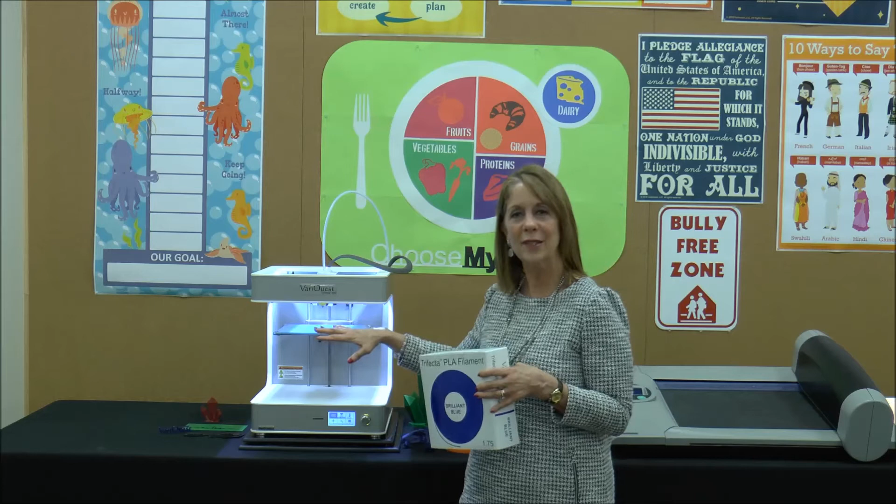It doesn't emit any messy substances or odors of any kind, and it's completely safe. Because it's plant-based and designed this way, that's how we're able to have this nice open footprint, because nothing heats up except for the hot end nozzle. The hot end nozzle is located up on top. There's a little yellow piece that goes around it to signify that it does get hot and you don't want to touch that area. But that's virtually the only area you or your students need to be aware of. Otherwise, everything is at room temperature.

So again, they can get close, they can watch the 3D prints come to life, they can get a nice bird's eye view as well, and it's completely safe.

When I talk about the hot end, just so you know, when it heats up to its maximum temperature, it's 220 degrees Celsius, about 430 degrees Fahrenheit. So absolutely make sure students keep their hands out of reach, but again, everything else is safe.

Getting back to this plant-based filament, it doesn't adhere directly to the glass build plate. That's why we have blue painter's tape to create that adhesion. It's such a simple solution because when you need to replace it, you just peel off the strips and put on new ones, so it's very easy to maintain and use. You can get blue painter's tape anywhere, and we also gave you a roll of it with your investment.

This is all described in better detail in the bed leveling video I referred you to. It's essential to have your bed properly leveled so you get a good print every time. Once you go through the video and the initial leveling steps, you should be good to go—unless you bring your Trifecta to a science fair or another event and it gets transported elsewhere, in which case you'll need to re-level the bed. Otherwise, while it's at your school and not getting jostled, you should be fine. So watch the video; it'll be very helpful.

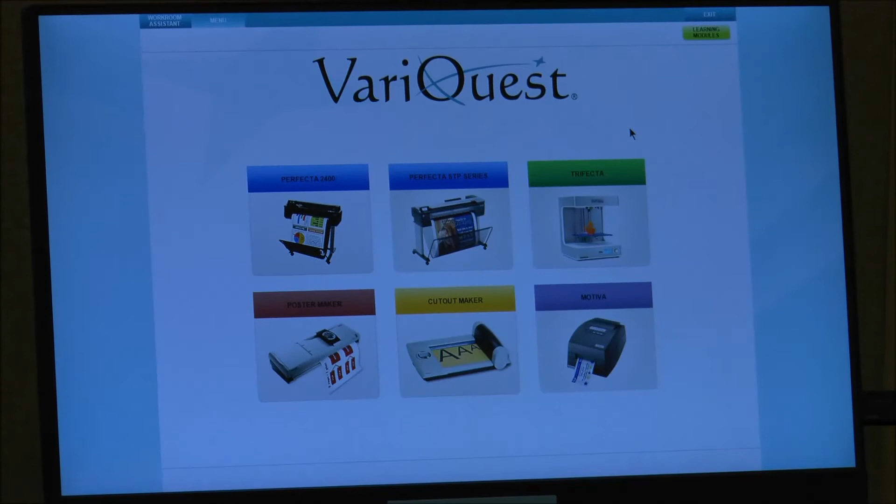Once you are ready to open up the Trifecta software, just click on the Trifecta icon, whether you're doing it from your design center or from a computer. Then what you want to do next is find the file that you want to slice and print.

I happen to have my STL files on my thumb drive, so I am choosing that drive. I'm clicking on the file where my file can be found. Once you have the 3D print selected, by clicking on it, just click OK. That's what actually launches the VariQuest software, and once it launches, it puts your object on the build plate.

Here's where you can adjust your printer settings before you print. I'm going to review those with you real quick, and then we'll proceed to slice the 3D print as well. In your user's guide, pages 15 and 16 go through each and every one of these setting options that I'm reviewing with you now, so you can become more familiar on your own time as well.

But a couple things to note. First of all, down below, here's where you have the option to resize your object before you print. It comes in at 100%. If you want to make it twice as big or maybe half as big, you can make those adjustments very easily. If you have your keyboard, you would just hover over it with your mouse and type in the percentage that you want, and you'll find that the height, the width, and the depth adjust automatically, but you can adjust those on your own as well.

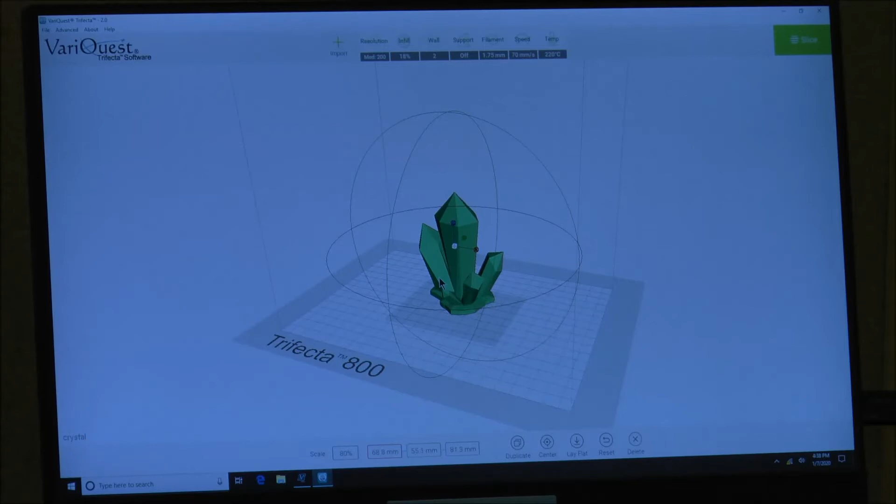But if you don't have a keyboard, like right now I'm just using my mouse, there is a white button that you can click on right by the object itself, and when you drag your mouse back and forth, you can see how it makes the object bigger or smaller, and it is changing my scale down below. So I'm going to make it a little bit smaller because I want to take a little less time to print this.

Obviously, the bigger it is, the more time it's going to take to print, but really there is no time limit. Keep that in mind, that you can print as long as you've got filament. You can print for as long as you need to get the desired object that you want. But that's how you can scale it and change the size of the object.

The other thing I wanted to mention is down below you can duplicate. If you know you want to do multiples of this gem, you can click on the duplicate button and you can enter in the quantity that you want.

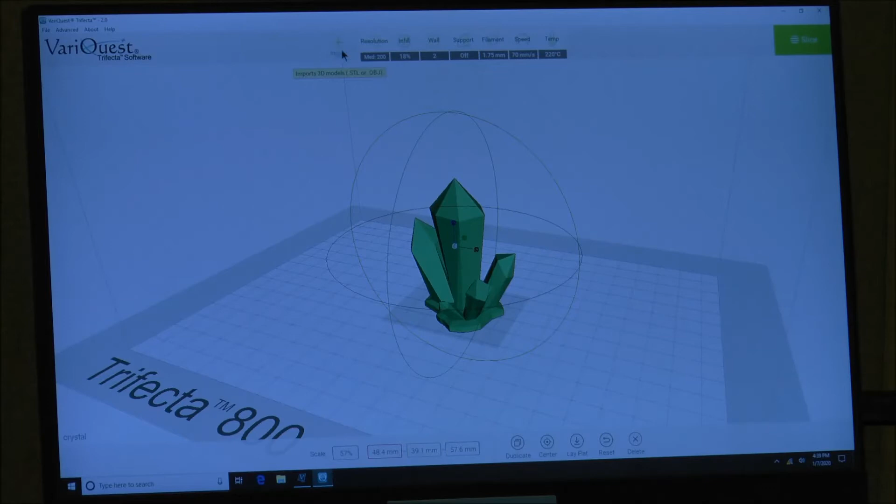There's also up above this import button that you can click on. This allows you to bring in additional prints. So you can go back to where you were and bring in another print, for example, and it just positions it right onto your build plate.

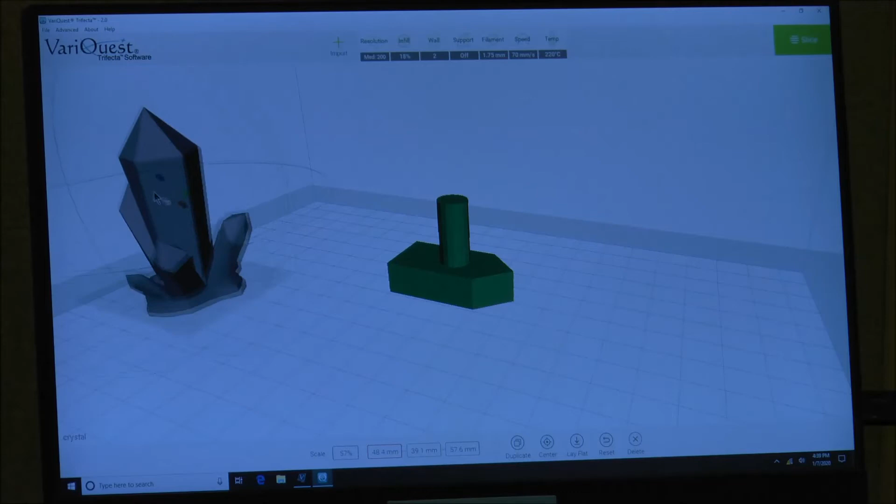Now, if ever you find that the object is gray like that, then you know it's out of bounds. So just keep that in mind. You always want it to stay within the printing range, and you always want to make sure that it's represented in green versus gray.

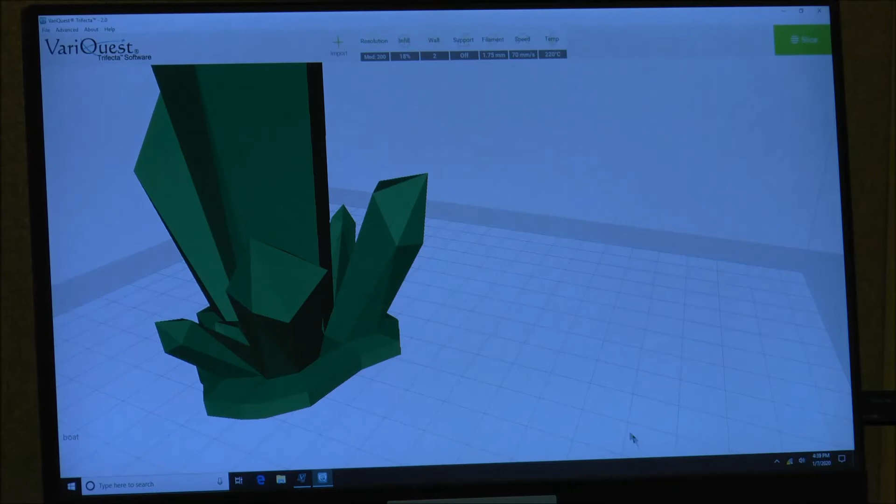You can always reset. There's a reset button too, to get back to where you were before. If you don't want a particular print on there, like I don't need to print two objects right now, there is a delete button as well. So I deleted that, and then again, I'm going to reset it.

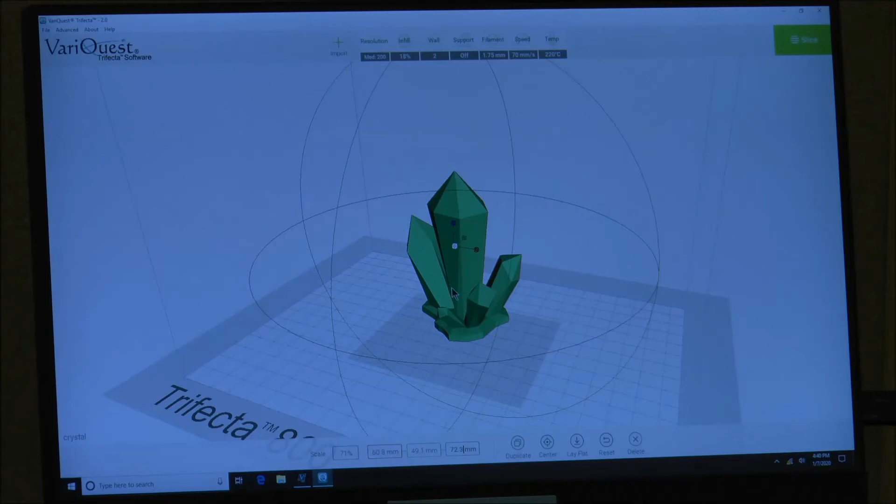You will find also that sometimes, and there's also a center button, by the way, too, so it just makes it really easy to get it back to the way you want it. I did reset it, so I'm going to go ahead and make it a little bit smaller like I did before. But sometimes you're going to find that your print comes in kind of kittywampus. It doesn't lay flat when it puts it on the build plate.

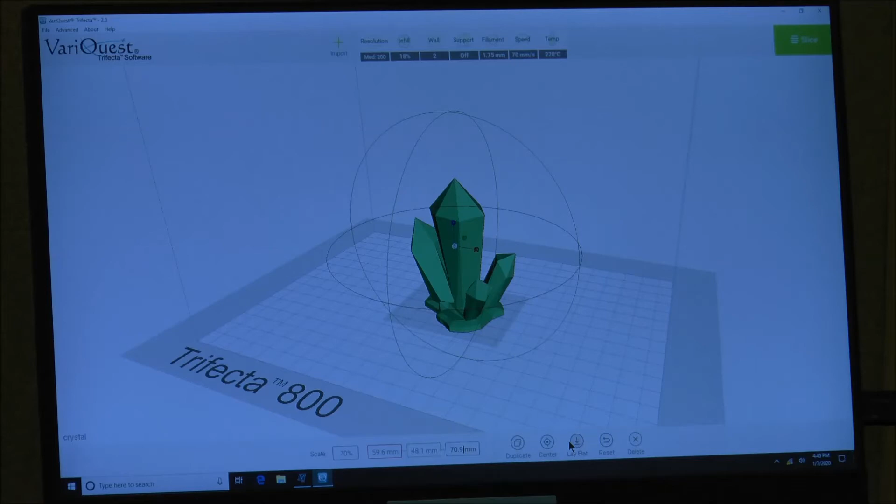If that should happen, there's a lay flat button you can click to make sure it's lying on the biggest, flattest surface to ensure added stability when printing. So if it comes in a little off, just click the lay flat button and it will make that adjustment for you.

You also have these different axis rings that students can use to see the print at all different kinds of angles, etc. So that's a little bit about that.

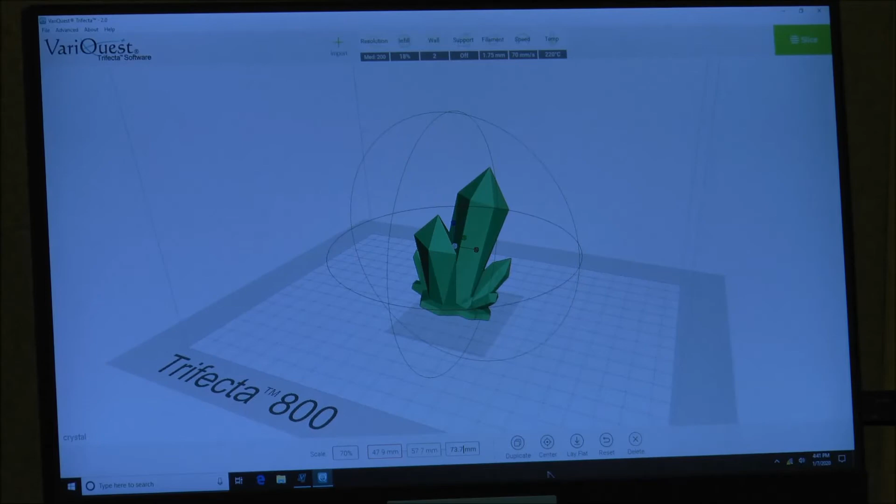Up above, you're going to find your printer settings. So that's what I'm going to review with you now, starting with resolution. What I love about this software is it's so user-friendly in that you can hover over a particular setting and it gives you a drop-down window that tells you exactly what that's going to do.

As I click on resolution, you'll find there are 4 different settings, ranging from 50 microns all the way up to 300. So 50, 100, 200, and 300 microns is how resolution is measured. The default is 200 microns, so you can leave it at that, or if you need adjustments, that's when you'd select a different resolution.

The smaller the number, the 50 microns, gives you the finest print. That means the layer of filament is as thin as it can be, and you get a very solid, really fine, high quality print when you select 50 microns.

Now with a gem like this, it doesn't really matter, so I could leave it at 200 or even bump it up to 300 microns. The resolution isn't going to be as good, meaning you'll see more lines going across representing the different bands of filament, but it still turns out to be a great print.

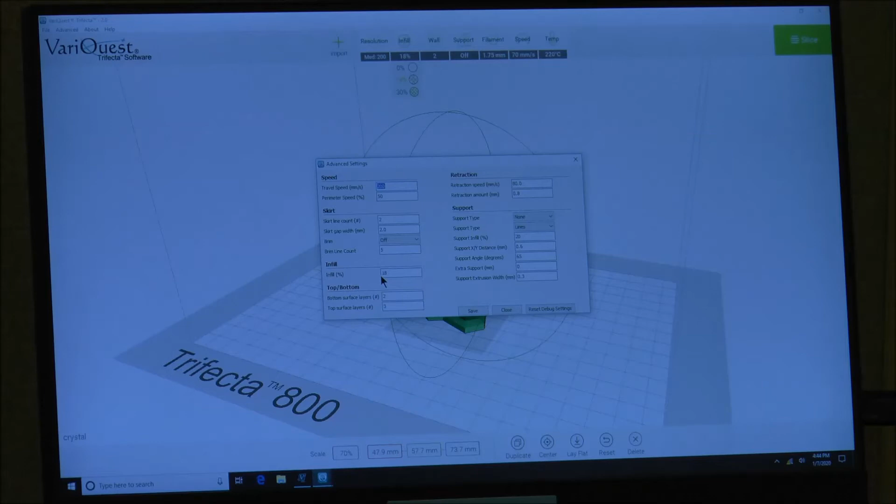The higher the infill, the more filament you're going to use, and the more time it's going to take to print, so do keep that in mind as well. I'm going to get back to this window in a second, but that is what infill is.

Next you have wall, which is the thickness of the outer perimeter of the print. The wall ranges from 1 to 4, and the higher the number, the thicker the wall. If you need added stability, you might want to select 3 or 4 for a thicker wall around your print. The default is 2, and for this particular object, 2 is just fine, so I'm going to leave it at that, but that is wall.

Next to wall is support. Support is not activated, but you'll want to activate it if you have overhanging structures. It's important to create that stability for overhanging structures. Think about an eagle with its wings fully spanned out, for example. When it's printing and gets to those wings, if they aren't supported, they're going to collapse right away.

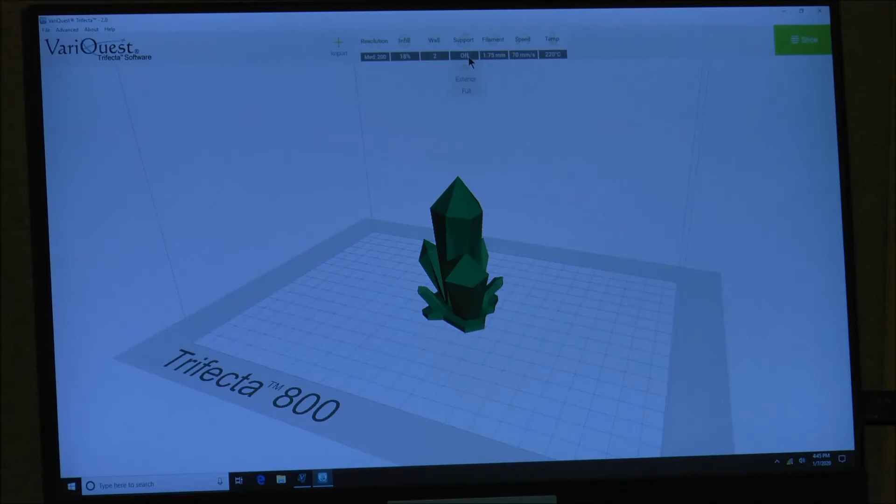So what you'd want to do is either activate exterior or full support. Exterior basically adds support from the overhanging structure down to the build plate, with thin strands of filament that adhere those two together to make sure the wings, in this case, don't collapse.

Full support adds support layers of filament, thin strands, wherever there are overhanging structures. So even if it's going from one overhanging structure on the print to another and then down to the build plate, it will do that. It figures out where it needs to build support, not just from the overhanging structure to the build plate, but anywhere it's needed. So if you're not sure, just select full, and it will build those support layers.

When your print is done, those support layers break off very easily because they're such thin strands of filament. So you just break them off and you're good to go.

Again, this is that trial and error process. Think about students going to print without having support activated, and their object collapses right away. Then they have to go back to the drawing board and figure out what went wrong, and it becomes clear that they probably should have activated support. It's all part of that hands-on learning approach, really engaging with these different objects being printed. So that is what support is.

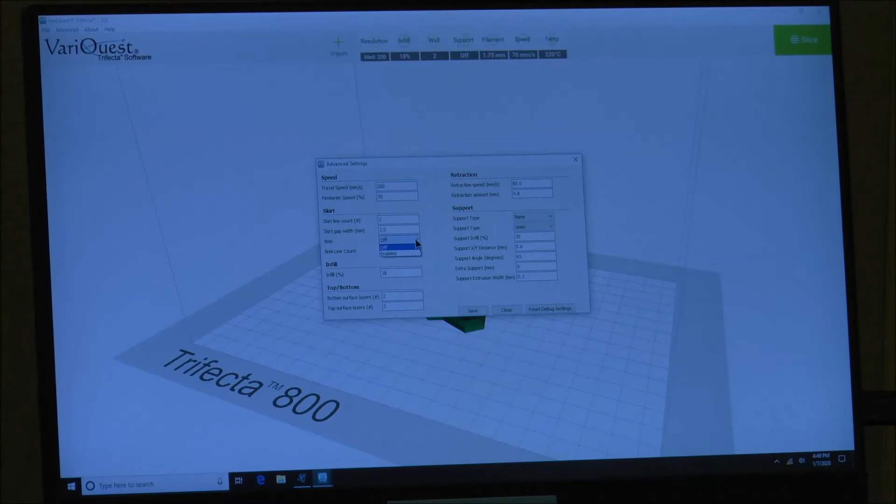What it does is, for those objects that need some added support on the build plate, you can activate brim, where it builds thin layers of filament from the base of the object and adheres it to the build plate. So even if you have a properly leveled print bed that you've maintained well, and you're still getting a lifting effect, you might want to activate brim to counter that lifting effect and keep it from warping.

I always like to give the example of the Eiffel Tower. If you're printing that, you've got a tall tower with four thin, skinny little legs. So your base can get a little wobbly and it can get more difficult to support that taller structure. For that, you would want to activate brim because it's going to secure the foot of the print to the build plate so it doesn't lift up or warp on you.

Note that when you take it off your build plate, you'll have those thin strands of filament under the base of the print. Sometimes those are a little harder to get off, so you want to use a chisel or a file to file those down.

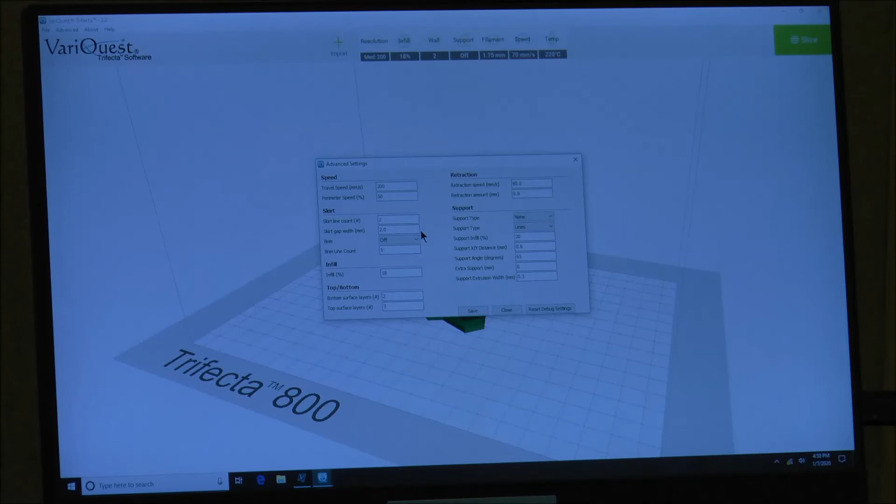But that's what brim is. Those are the features that I like to call out in training as it relates to the Trifecta software, the advanced setting options that you may or may not choose from time to time. So just wanted to cover that.

Once you have everything the way you want it, then you're ready to go ahead and slice your object. Up here in the upper right is where you see the slice button. Just go ahead and click on that. As you can see, it's kind of like frosting a layered cake. It just builds it layer by layer until it's done. So it does it digitally, and that's how it's going to print on your Trifecta printer.

Once that has occurred, you'll notice down below that it does give you the approximate weight of your 3D print, and it tells you approximately how much time it's going to take to print it. So that's very helpful information.

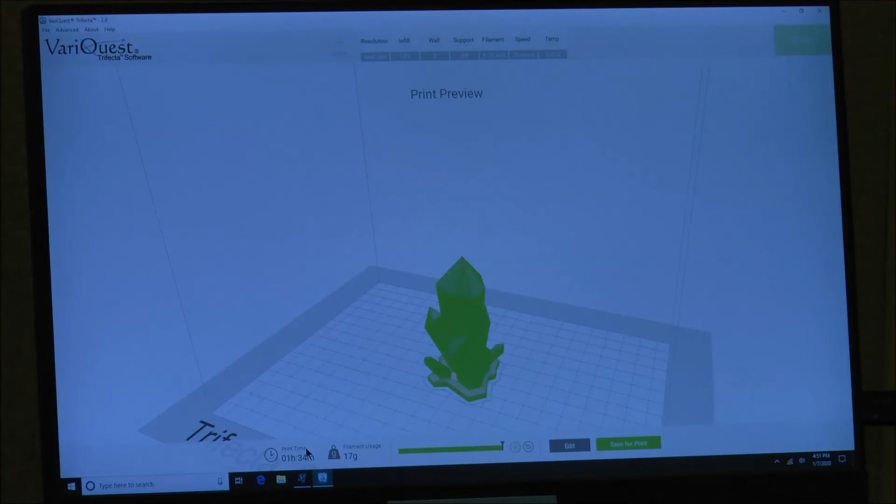We also on our VariQuest Resource Center have a cost calculator. So on the home page, click on Trifecta, click on the cost calculator, you can input the estimated weight, and it will give you an approximate cost for that object. Great for your student-based enterprises where you are tracking costs, because maybe you're selling different things in your school store. It's nice to be able to calculate an estimated cost of that 3D print.

I always like to show this too, how you can just kind of flip the build plate around to see it from all kinds of different angles as well.

I also wanted to mention that our Trifecta has one hot end nozzle, as I kind of alluded to earlier, and that means that you can load one color of filament at a time. But we recognize that there are going to be times that you want to do a multicolored object. That's another feature of the Trifecta that's so nice for schools, because having only one hot end to worry about is really going to help with cutting down any maintenance issues, any problems, etc. So nice to have just that one hot end nozzle.

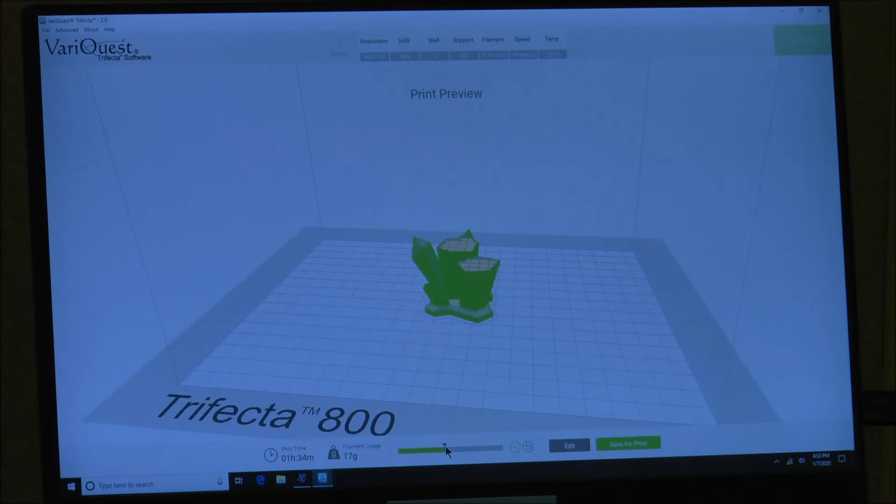But again, we know that periodically you'll want to do a full color print from time to time. So the way that you can achieve that is down below. After it's been sliced, you'll see that you have this bar with this arrow. When you move the arrow with your mouse, you can see how it's recreating or building that object layer by layer. To add different colors to your object, all you do is take your arrow and pull it to the point where you want it to pause so you can change out your color. You put your arrow at that desired spot, then you click on the plus sign, and that is going to pause your print job so that you can take out your existing color, put in a new color, and resume where you left off.

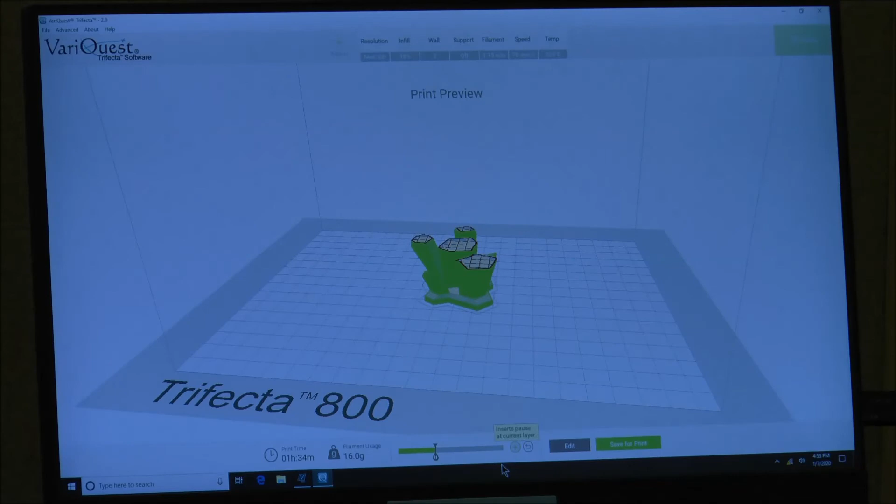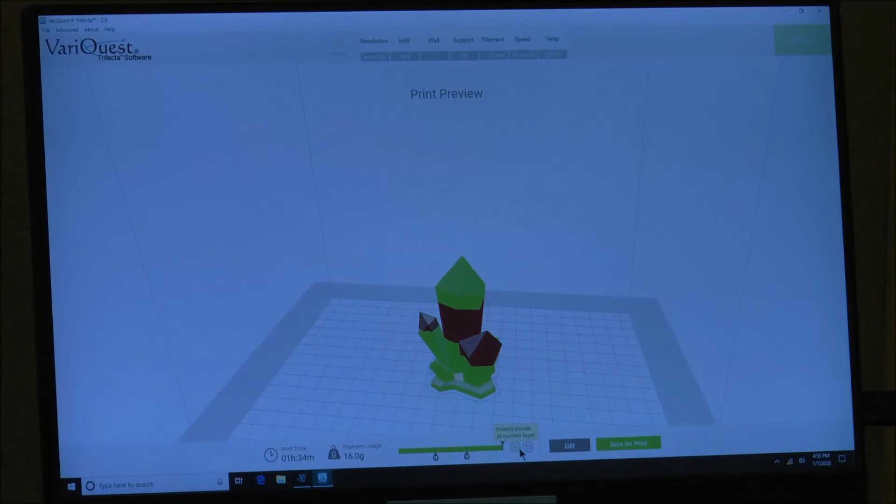Then you can take the arrow again. You can build in all your pauses in advance, of course, and do it all the way to the end. So here you can see I'm going to be able to get a multicolored object. I can do 3 different colors, and again, it will automatically pause so I can take out my one color, put in my new, and achieve a multicolored object that way.

Another use, and we have so many schools that have engaged their students even further by using our clear filament, printing their object, and then having students paint their object any color that they want with acrylic paint is what we recommend. They can really take ownership of what they've created by adding some pops of color and painting that 3D print as well. So that's another way to achieve a multicolored object.

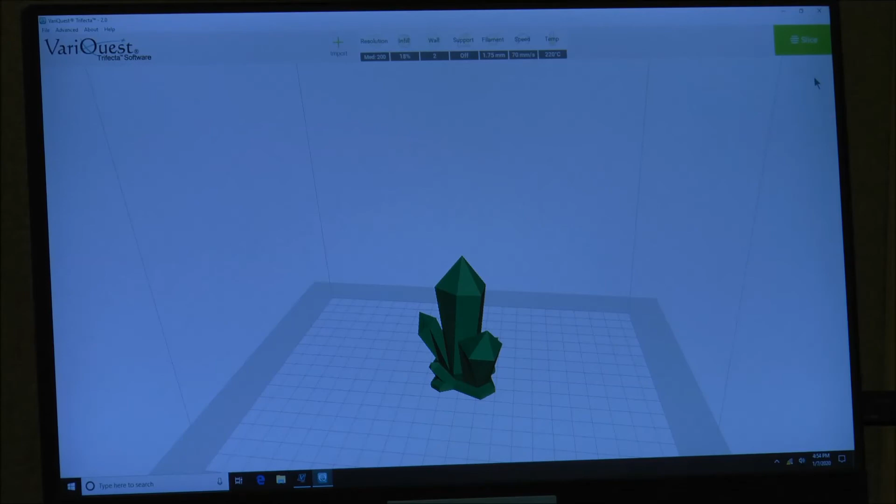Now I'm going to go ahead and edit this because I don't want it to print in multicolors right now. So there is an edit button that takes you back to where you were, and you can just easily slice it again if you should go back and make any edits. And there we go, we've got it perfectly sliced. Now what I'm going to do is save what I've done.

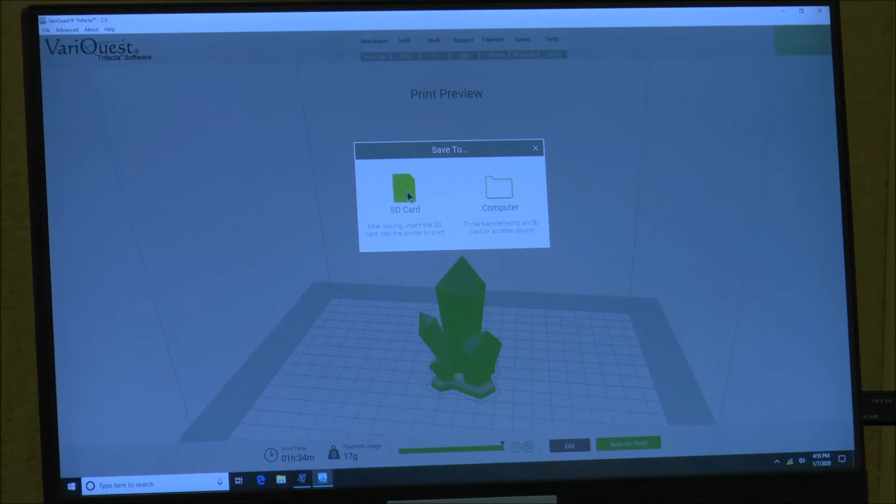I can save it on my SD card, which is what I need to do in order to print it on the Trifecta, but I can also save it on my computer to bring it up at a later date. I'm going to click on the SD card. It just takes seconds to save it, and then I've got a button that allows me to properly remove my SD card. So I clicked on that button.

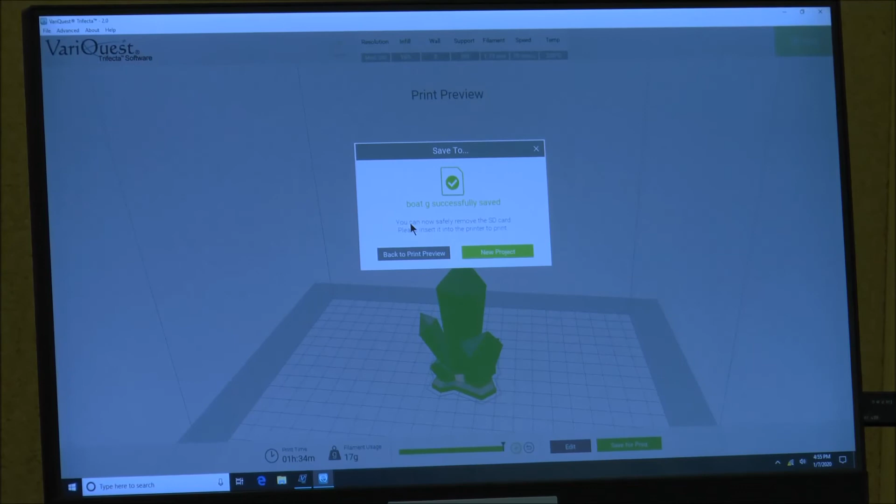Now I know it's safe to remove, so I'm going to zoom back out again so I can grab a hold of my SD card. And you'll find that once you have that and insert it in your 3D printer, that's again where everything comes to life. Insert my SD card.

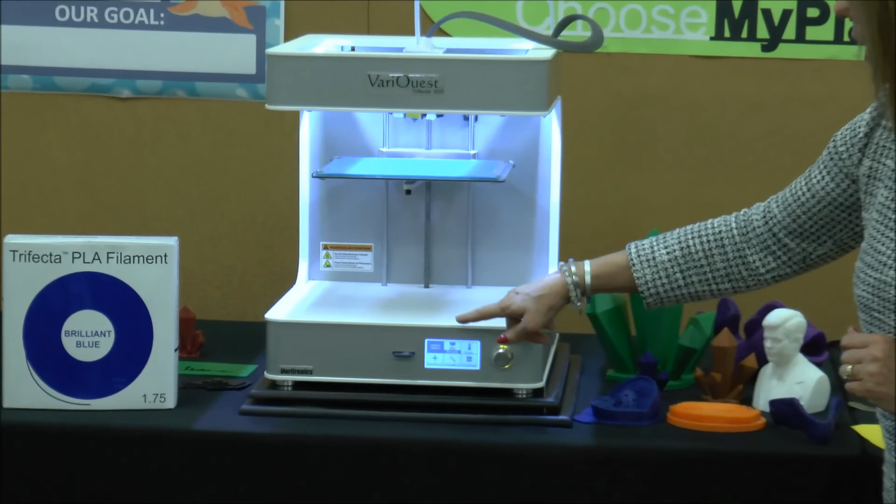I'll zoom in a little bit on this base so you can see what I'm doing here. I inserted the SD card. I've got my different menu options in this display. It's highlighted print, so I can just take my knob and push in to select that option.

Here are all the different print-ready files that I can review and select for printing. So here's my Crystal. It says crystal.g. Of course, that represents that it's in G code, that's the file format as mentioned. So I'm just going to select my Crystal.

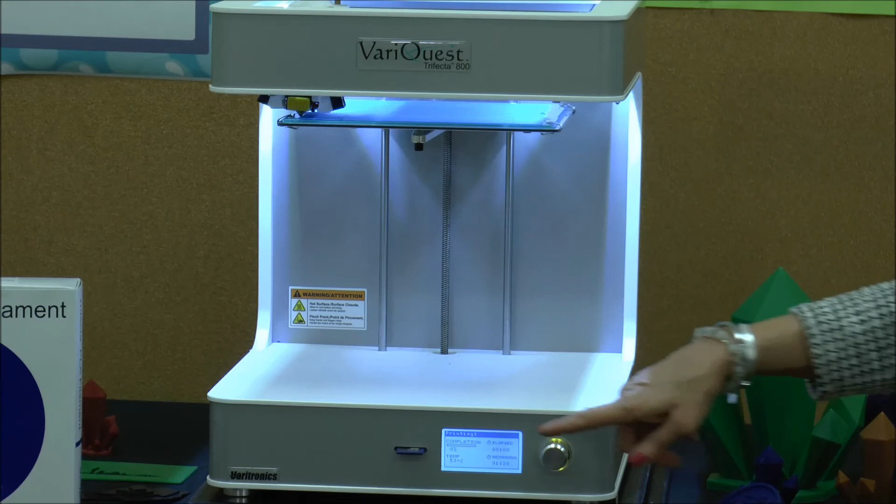Now we'll go ahead and make sure we got a good shot of the Trifecta as it gets ready to print that Crystal. Right now what it's doing, the display shows it too, is telling me it's heating up, the hot end nozzle is heating up to the desired temperature. You've got a progress bar that shows you how much time remains until it reaches 220 degrees Celsius. It really doesn't take very long at all, which is nice.

Once it is ready to go and at the desired temperature, you're going to notice that it's going to extrude a thin line of filament right here at the front of the build plate. There will also be a little bubble, if you will, a filament that extrudes.

That is another way to determine if your build plate is properly leveled. If that little bead of filament comes out really squished and you can hardly see that it's a bead, then you know your build plate is too high. If it comes out perfectly round and not at all squished, then you know your build plate is too low. Again, you can always make those micro adjustments as needed.

You want that bead to appear slightly squished. It's like using a plastic straw and kind of pushing down on that straw. You just want it to appear slightly squished, and then you know you've got a properly leveled bed.

The other thing I'll point out is in this window, it tells you how long it's going to take for that print to complete itself. And while it's printing, it always gives you how much time has lapsed. So that's a really good indicator, so you have an idea of what to expect and what remains before it's completely printed.